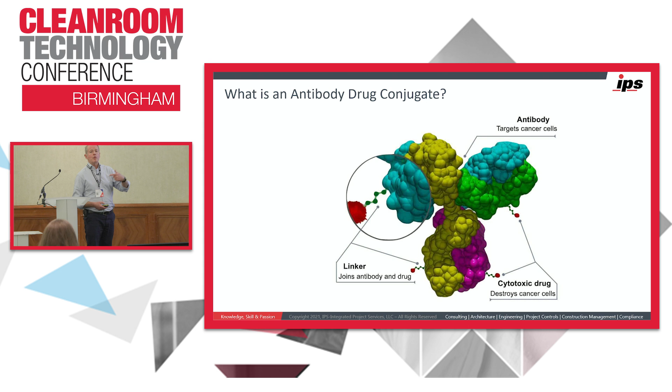Now, they are quite complicated because this linker sometimes detaches, sometimes doesn't, and it's all by design. If that linker detaches, sometimes this highly potent thing can leave the cell and go on to neighboring cells, and that's what you don't want a lot of the time because it can damage healthy cells. There's 15 of these actually being licensed at the moment globally, but not in every country. In the US, I think there's 13 licensed for use. In Europe there may be 15. But it's only been growing over the past 15 years.

So we go to the next one. This is more just pretty pictures, okay? So there's your MABs, there's your cytotoxic agent, and there's your linker. And this is how it's internalized. There's antigens like this on the surface of cells. So the idea is, with a cancerous cell, a tumor, you have certain receptors that are more prolific on these cells. So the ADC, or the MABs, targets these cells and doesn't target the healthy cells.

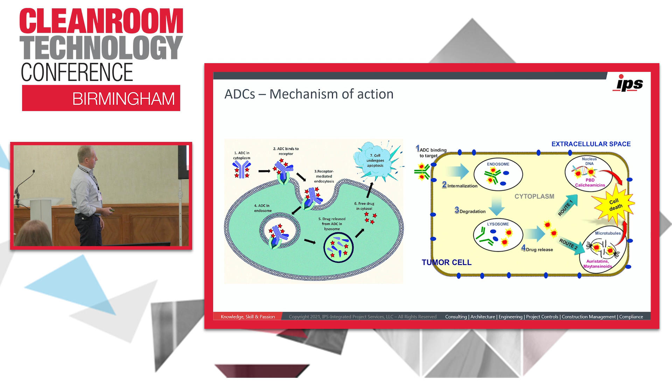That's how it works. So with certain types of cancers, there's a lot of certain antigens on the surface of those cells, and they're targeted. And the ADC, as it's traveling through the body, just ignores all the healthy cells. It's simple as that. And that's just a picture of what happens when it goes in, and there's different modes of action when it goes into the cells.

So a historical perspective, this fella here, Paul Ehrlich, he was born in Poland, but he lived in Germany for most of his life. And in around 1900, he came up with this phrase: if a compound could be made that selectively targeted a disease-causing organism, such as a cancer cell, then a toxin for that organism could be delivered along with the agent of selectivity. So that actually describes an ADC. He was thinking of that concept in 1900.

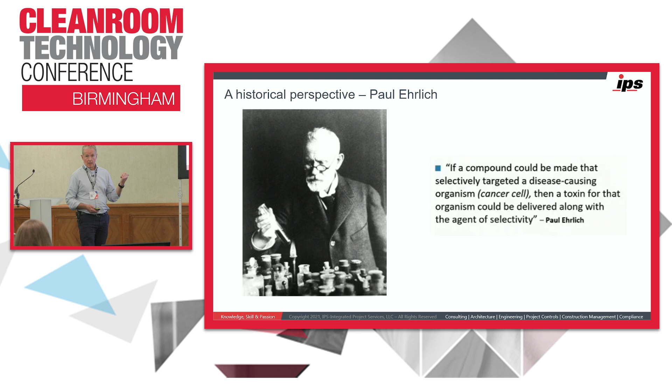So this guy was brilliant, okay? He won the Nobel Prize for medicine. He discovered a cure for syphilis before penicillin was brought in, okay? And he came up with this word, magic bullet. So any time you have somebody talking about ADCs, they always mention this person here.

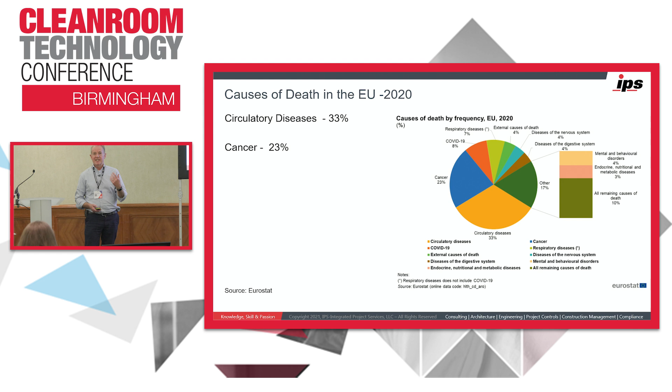Now, I don't expect you to see this, but when I was looking at ADCs and I've been developing them, I said, well, what's the biggest cause of death in the EU? It's circulatory diseases, 33% in Europe, okay? But cancers, it's falling behind at 23%. And all ADCs at the moment, they're all dealing with oncology, okay? These cancer diseases and tumors, okay?

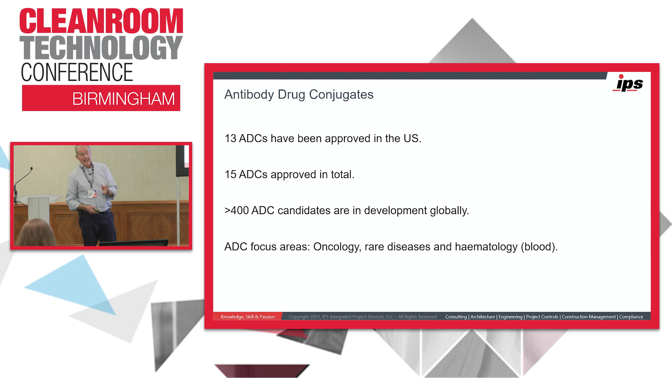So this is just a summary of what I talked about already. There's 13 approved in the US, 15 in total, but there's loads and loads of development being done. Over 400 are in different stages of development, all stages, and many of them in clinical trials at the moment, okay? And the focus area mainly is oncology, but there is a bit in rare diseases and hematology as well. So these are the ones here, okay?

And what I did is, at the end of it, you see what they're for: leukemia, Hodgkin's disease. Now, Mylotarg, for example, that was the first one that was approved in 2000, and then it was withdrawn in 2010, okay? And this is happening a lot with these ADCs at the moment. They're being withdrawn for various reasons because they are quite dangerous, yes? So the negative effects on patients versus the benefits can be quite severe.

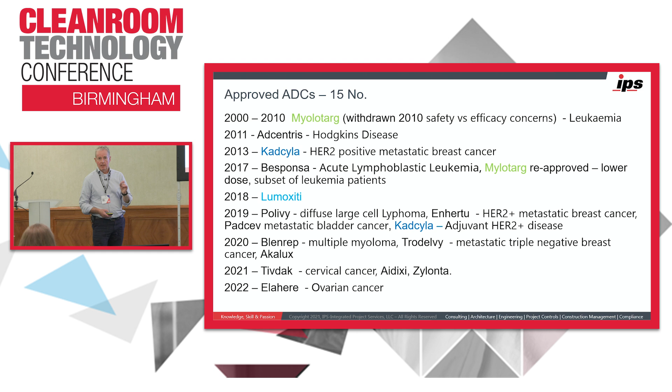So Mylotarg was then, let's see what year it went. It was reapproved in 2017, but for a lower dose of the drug and for a subset of leukemia patients. Now, there's some big blockbusters in here. I have a slide. These are the main companies out there at the moment who are investing billions, and they're acquiring companies. That's how pharmaceuticals operate. They just acquire companies.

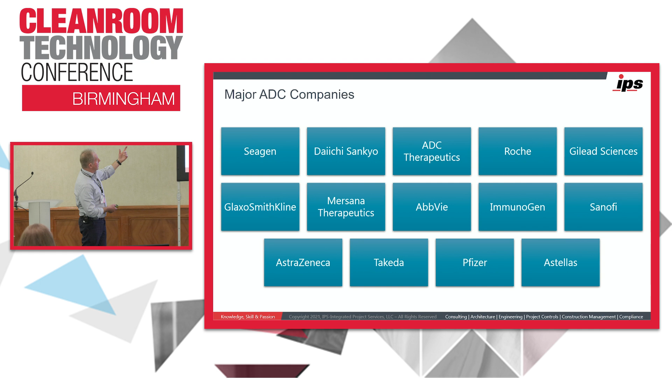And there's a lot of contract manufacturers out there as well, okay? So Lonza, MilliporeSigma, that's the German Merck over in the States, Piramal, the Indian company, SK Biotech, Korean company, WuXi, Chinese company, Lotte, I can't remember where they're from actually, and Samsung Biologics. They're the big players in contract manufacturing, and why people go to contract manufacturers for these type of drugs is because they're so highly potent, yes? And these companies have the skill sets to deal with these high potents.

Now, I'm going to show you a few designs of typical facilities. I can't give you too much information, unfortunately, but what I'm trying to say in these slides is the ADCs are new, the design of the facilities are new. We are finding our way. And a lot in the pharmaceutical industry is subjective, emotional, and people's opinions, and it's not based on science. It's not like drug substance.

I was involved in Pfizer Grange Castle. It was Wyeth at the time in 2000. We knew what we were doing, okay, because the company had built lots of big facilities like that. All these ADC facilities are totally different. The unit operations are more or less the same, but they are multi-product. They're all very, very small scale. You're talking about 60-liter reactors and stuff like that.

You have to have isolation technology, but there's different types of isolation technology. You have a bulk fill operation. Some people want to do it under grade A conditions, which is absolutely crazy, you know what I mean? But you can't argue, okay, because it's in its infancy and you have different parties involved.

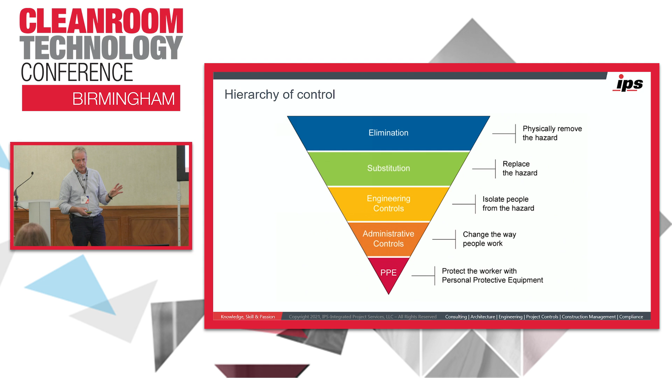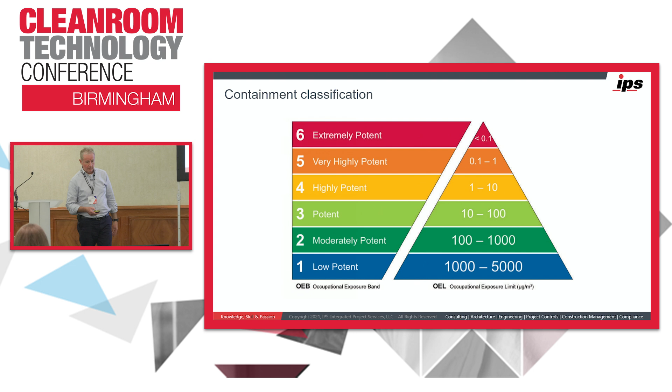And this is, if you ever are designing a plant, people keep going on about OEB levels, OEB 1, 2, 3, 4, 5, 6. There's about 50 different bandings. Yeah, so OEB 5 means absolutely nothing. You need to know what the OEL is. But anyway, any stuff to do with ADCs, it's the top level anyway. It's extremely potent. That's it. Extremely potent.

Okay. So look, there's legislation all over the world. You know what I mean? But the onus is always on the employer to protect the employee. But the onus is also on the employee to behave. You know what I mean? And especially with high potent.

One of the sites I worked on, if there's a spill or an incident with these materials, you have to react appropriately. And you'll see on these sites decontamination kits and special buckets all over the place. And some operators think, oh, we just have to pour this on the spill and it deactivates it and everything is safe. Well, that's okay for product A, okay? If you have product B, it may not work on it.

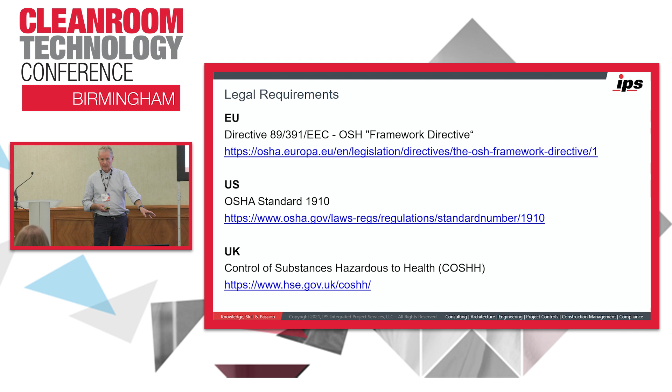So you have to question everything, because I was on the site and I was told by somebody, oh, we use this material and we use it for any spill. So always question what's going on out there with high potency, because people just don't understand.

So risk, I was talking about risk back on the hurling and stuff like that, so it's similar here. Risk is exposure by the hazard. The hazard is the OEL, there's nothing you can do about that. But the risk of exposure can be reduced, for example, if it's in liquid form. When it's in powder form, it's a big risk, you need to do it in an isolator. Once it's in solution, the OEB typically can go down.

A lot of companies don't like that. They say, no, the band it's in remains band 6. That's crazy, right? But it's again trying to convince people that you can base it on sound risk assessments, that you don't need to over-design these facilities as well.

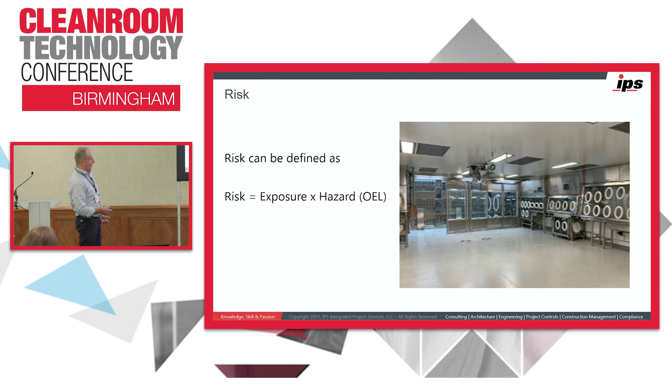So what you'll see here, that's just an extraction booth, yeah? And that's where all liquid operations can take place in this facility. This here is a glove box, that's where powder is present, okay? Some companies wouldn't allow you to do that because they're saying, just because it's liquid form, we're still treating it as an OEB 6 operation, okay? I just like this picture, okay?

So what I was trying to get here is liquid waste. You get liquid waste from the process, from CIP, from emergency showers, and from fire water. And one of the things that a lot of companies don't think about is fire water. So if there's a fire in one of these places, will the fire water be contaminated, and where does the fire water go? Now, that fire water needs to be contained and it needs to be tested prior to being released to the environment. That's not what happens, by the way, okay? So you always have to question everything.

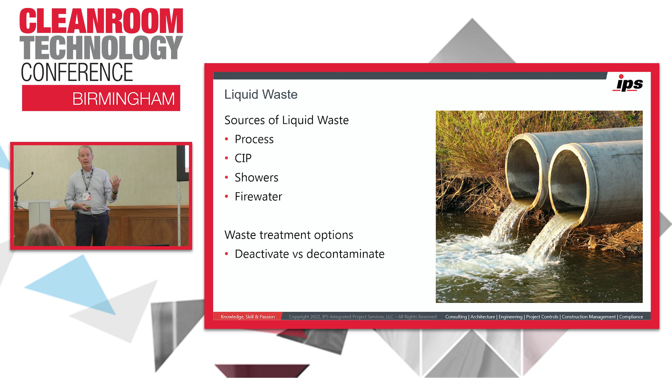Also, typically, you'll collect this waste in special tanks, and those tanks will be in bunded areas, typically located outside. So you get rainwater in that bund. So what do you do with that rainwater, do you treat that as potent waste? Some companies say, oh no, we'll test it, and when we can find nothing in it, we'll dump it to the local environment. In a lot of the cases, you actually can't detect it. That's because it's new, and because the EPA is not on top of this at the moment, that's a risk that's out there. So I'm just sharing information, okay?

So ADC facility, you probably won't be able to read this, but what I was trying to show in this slide was when you're designing one of these facilities, there's lots of factors. There's sustainability, but the challenge with sustainability, you do need excessive use of water and chemicals to clean, to make stuff safe.

For example, if it's a filling line and you're filling this highly potent stuff, you can't just take parts of the filling line out and put it in a parts washer. You need to rinse and rinse and rinse inside that isolator to get some level of assurance that there's no free powder or anything like that on the line. Then you bag it out, you bring it to your parts washer, yeah?

Somehow load that parts washer safely without releasing anything into the air, without the operator wearing breathing air, by the way, because if they do, you've failed, okay, because that's your last line of defense. And then you have to wash and wash and wash if you need to reuse that equipment again. So what we find in these ADC facilities, we try not to reuse equipment. We try to focus on single use. Get rid of it, incinerate it, okay?

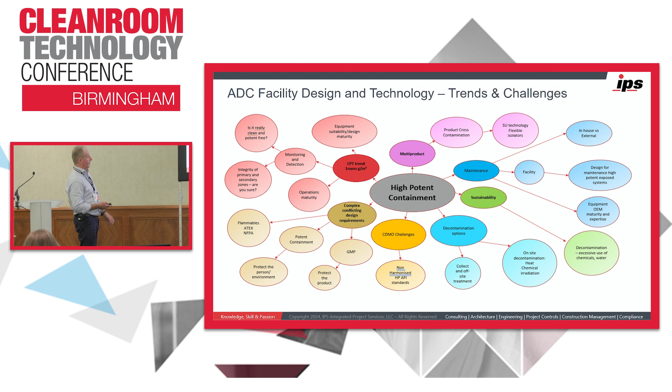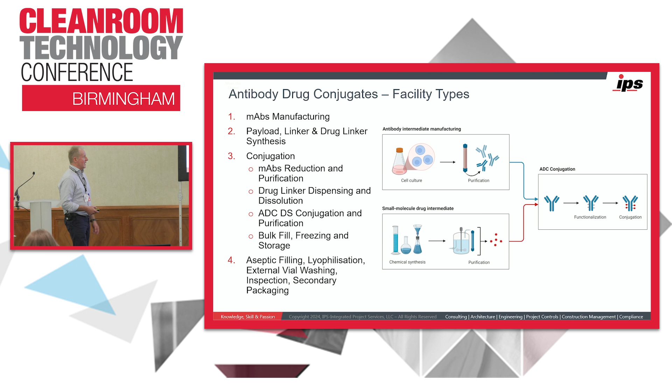All right, so what I'm trying to show here is there's mAbs manufacturing involved, there's payload linker and drug linker synthesis going on, there's conjugation, and there's aseptic filling and freeze drying, external vial washing. You have to do external vial washing because it's highly potent, okay? Inspection and secondary packaging. They're all the unit operations.

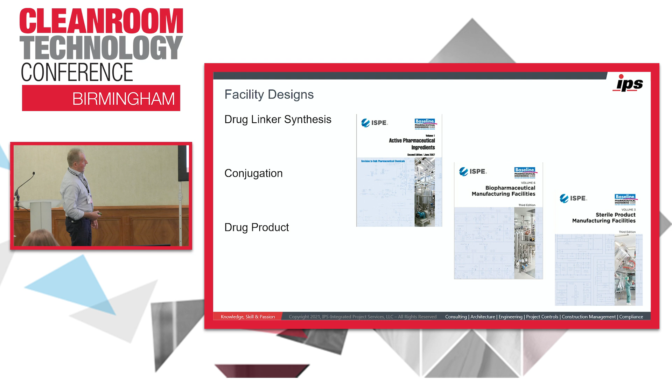Now, there's loads of guides out there. I use the ISPE guides, they're great. So there's the ISPE guide for API, that'll deal with the drug linker. There's the biomanufacturing facilities, that'll deal with the conjugation. And the sterile product manufacturing, that'll do the fill finish bit of it. And then if you're talking about containment, there's tons of containment guides out there as well that you need to read. And these are quite difficult to read, some of these documents.

So if you have a 1 nanogram, or say 10 nanogram OEL level, when you're buying a bit of equipment, the vendors will need to demonstrate to you that their equipment will meet those requirements, and you typically test to 10% of that, so they'll be doing tests to 1 nanogram containment. There's very few vendors out there that can do that. So you have to do a lot of due diligence.

I think yesterday somebody was talking about isolators for high potent containment. There is a company in the UK, Solo Containment, which is part of ILC Dover, the American company, and they do flexible isolators for high containment applications down to 10 nanogram. And we're buying a lot of them for high potent applications because you don't have to worry about cleaning them or anything. Solo Containment are experts in high containment applications, as are ILC Dover.

Having one of those where you use it, you vacuum it up, and you send it off for incineration, versus having a very complicated isolator where you really can't demonstrate it is free of the potent material because you can't really test it to find traces of that high potent. I think it's a no-brainer, but we do have certain clients, I can't mention the names, they are American, top-tier pharma, and they won't accept flexible isolators for high potent. Now, when you're going down to 1 nanogram, like Lonza are doing at the moment, plastic won't work for that at the moment.

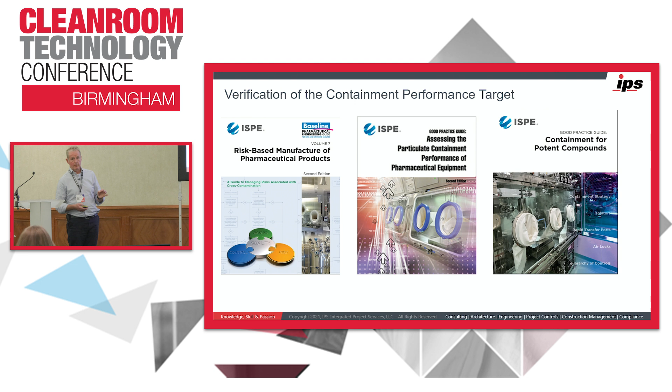So what I'm going to talk about quickly now is some of the designs, just to give you a flavor of what's out there, what we've been involved in. Primary containment is typically the item of equipment. Secondary containment is typically the room. So it could be the reactor as the primary containment. If it's a freeze dryer, it'll be the freeze dryer plus the isolator that's around it, because you open the freeze dryer when you're trying to unload it and load it.

Disposable versus reusable equipment. I'd always propose disposable equipment unless it's not suitable for the application. Some conjugation reactions and the solvents involved, they're not suitable for disposable. Cleaning, decontamination, deactivation, your approach to that. Are you going to use stuff once and just get it out? Are you going to try to decontaminate or deactivate? You can deactivate some of them, but very few of them. And there's vendor experience and expertise. That's key. You really have to spend money on this.

And then there's multi-product flexibility. A lot of these facilities we're designing, in fact all of them, none of them are single product. So the clients are saying we want to build multiple flexibility into the design, but we actually don't know the process. So we just have to make the rooms big enough and make sure the unit operations will fit in the rooms. And the scale of operations. The scales, look, it's all small scale. It goes from 10 litres up to maybe a metre cube. So they're small scale.

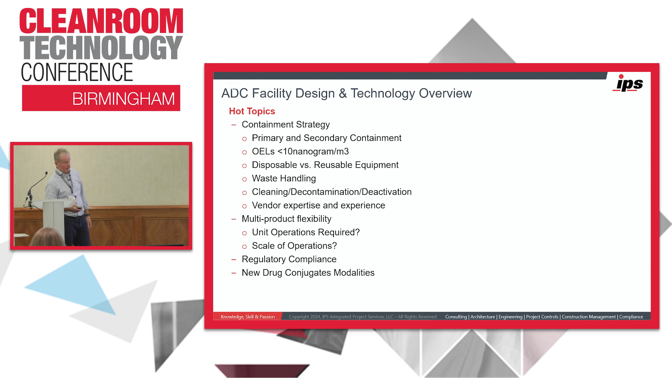Regulatory compliance is a big thing, which I talked about, the different regulatory compliance requirements for the different phases of the unit operations. And there's new drug conjugate modalities. Because I talked about antibody drug conjugates. There's peptide drug conjugates. In fact, we're doing a job in the States at the moment. It's a $1 billion job where they have antibody drug conjugates and peptide drug conjugates in the same campus. Right. So this is one job in the US.

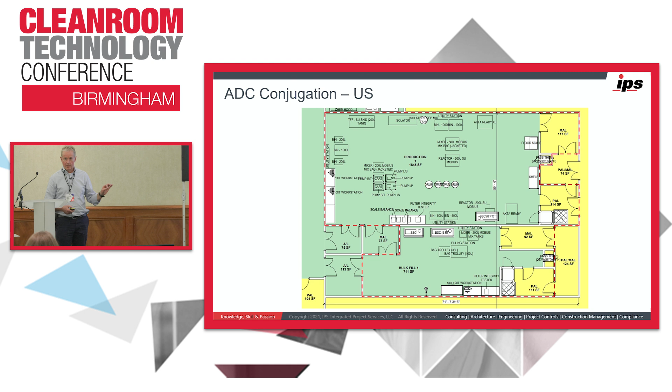Here it's in the C room. Sometimes people want it in a B room, into an A container. It's nonsense, but that's what some people do. And what you'll see here is that the big thing, this is the containment boundary. Now, Justin in a few minutes is going to talk about airlocks and getting into these rooms and getting out of these rooms and misting showers and all that stuff. So what I was trying to say here, it's 10 nanograms, it's multi-product. They don't know the products, actually.

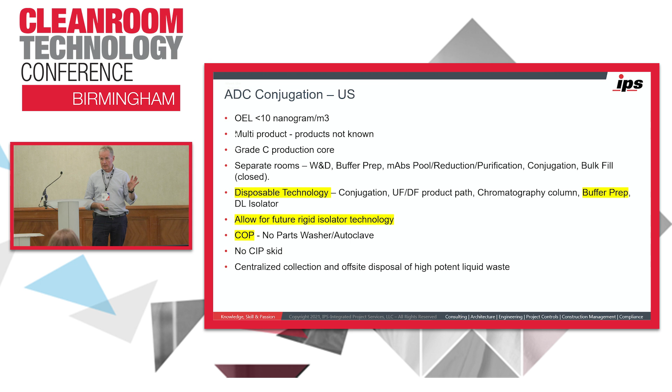It's disposable technology. Now, they wanted to allow for future rigid isolation technology because they weren't sure whether the flexible would work if they went lower. And they've no clean out of place, no parts washer, no autoclave, because they're going to chuck everything out once it's used. So the rule of thumb when you're dealing with high potent stuff: if it doesn't need to be in the room, don't bring it into the room. If you're making up buffers, you don't bring the buffers in the room, you pipe them through the room, and you make sure when you're pressurizing the room, you don't pressurize from the high potent zone to the safe zone. It was the basics.

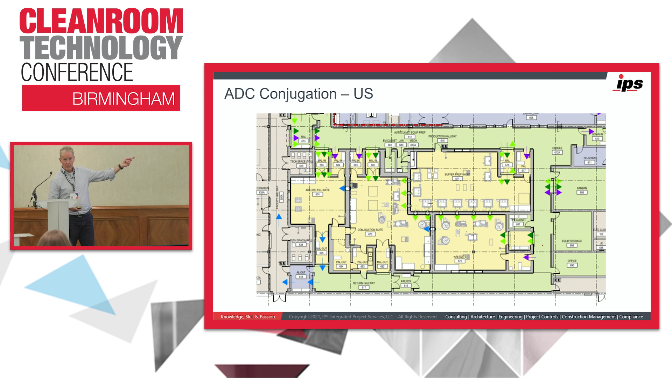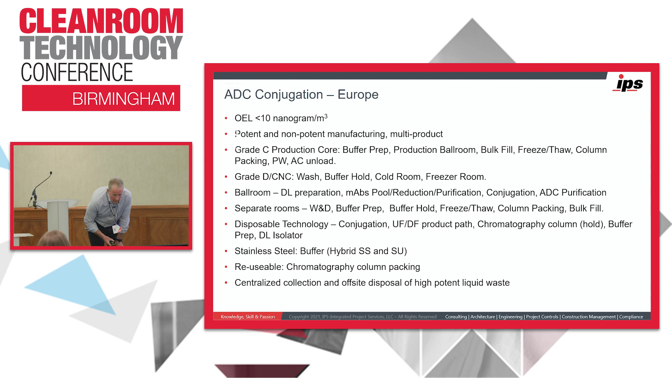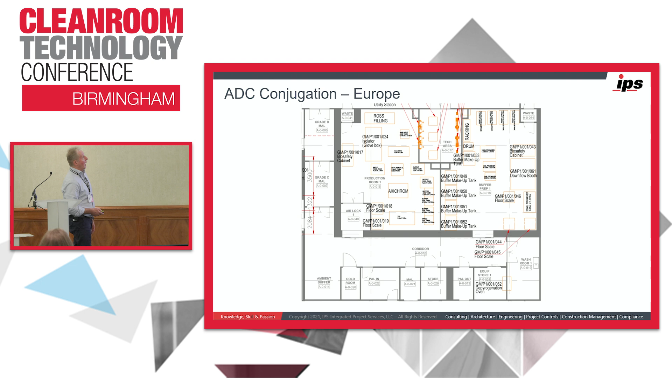So what's this? This is one in Europe. In fact, this is a ballroom design. I want to get you a layout here to look at. This is one very close to home, in the UK. And this is a buffer prep zone here, and this is a conjugation room here, and everything is happening in the conjugation room. This is a contract manufacturer here, and it's 10 nanograms.

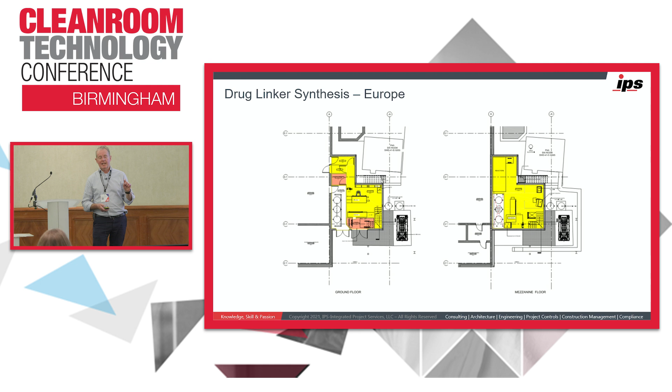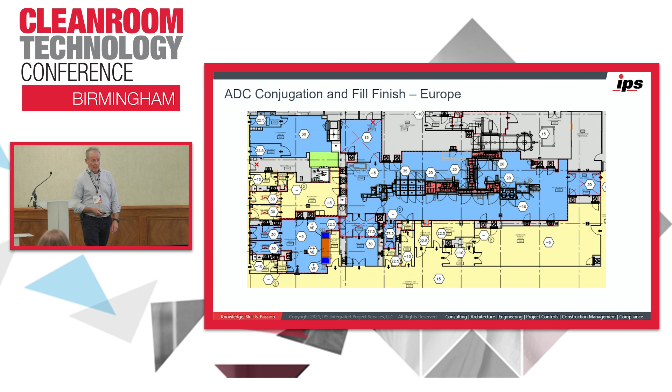So these are the considerations for these type of facilities: flexible versus rigid, active containment isolators, extract booths. Some people, believe it or not, stick their unit operations like chromatography and UFDF all within extract booths. Some have them sitting in the middle of the room. So, I mean, it's the same containment requirement, but they're all different. And it's just the way it is in the industry at the moment.

Breathing air, some have it as standard, some have it by exception. If you're dealing with solvents, you need to do ATEX risk assessments, which is a bit of a challenge. So you got GMP, you got high potent containment, and you got ATEX all in the same suite. There's multi-product and multi-modalities that offers a challenge as well. And some people want potent and non-potent in the same suite. You can do it, but obviously you just need to risk assess how you do it.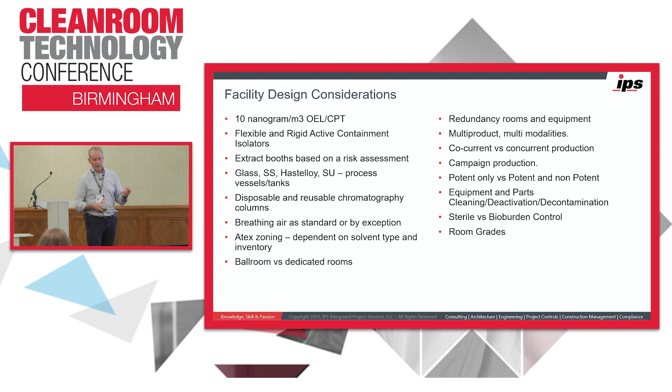Yeah. And there's sterile versus bioburden control, as I talked about in the bulk fill, and the room grades as well. There's no consistency in room grades. Right. So now we get to the interesting bit, Justin, architect.

Thanks, Kevin. Okay, I will run you very quickly through the clean room operating as an engineering control for this. And I think Kevin touched on it very well there. You know, when we do this work, we have to cooperate really tightly with the process engineering and the process technology group. That's why there's two of us here. We can't treat each other with the distance we used to. We really have to work really closely together.

And it's because you keep getting the consultant's answer to everything in these. It depends. It depends on the risk assessment. It depends on the equipment. It depends on the operations. But I think Kevin covered it again accurately. Engineering controls is what we're interested in here. For various reasons, we can't do the top and we don't want to do the bottom.

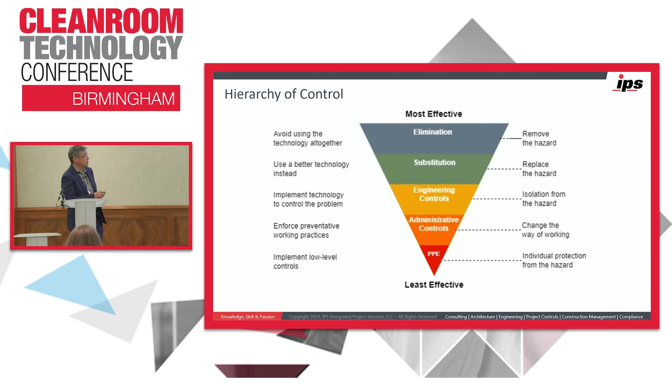I'm going to go quickly through this, but your primary containment is your closed process, whether that's a vessel or whether that's an isolator, depending on where you are in the process that was described there, from the API through the conjugation down into the fill finish. There will be different primary containment, but there will be primary containment.

Secondary containment is something that's been around API forever. It's been around potent substances forever, but it's much, much more critical now because of two things. One is the very high levels of potency that we're using, and the other is it's not always detectable. We can't assume that there hasn't been a breach within the primary containment. So your secondary containment really does become a massive part of how we design these facilities and how we think about them. Tertiary containment, you know, you don't want to build this thing in the middle of a very sensitive area.

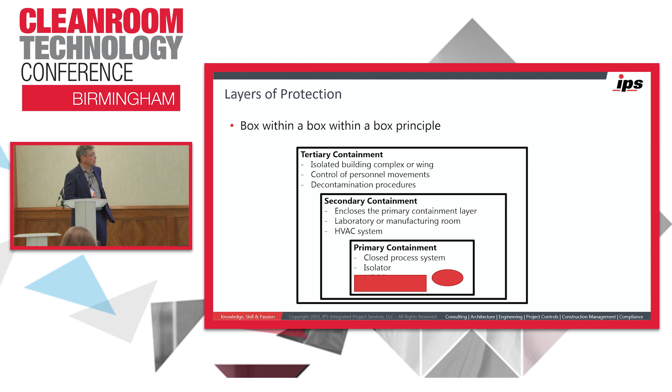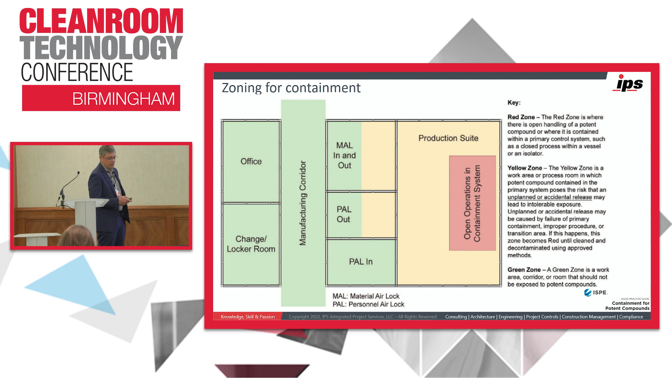It's not necessarily whatever type of facility you're in. This may not be behind a garbing area. So, you know, you're not very far away from danger, and it is important to get it right. So how do we do that? We do that with airlocks, which is what we've always done.

Blow all the air from the corridor in there, and that protects the corridor, and you've still got your airflow out of production. And that works in some scenarios. The difficulty with it is our friend Annex 1 tells us the airlock has to operate at the same standard as the production facility behind it. Doors are very seldom proven to be 100% sealed, and anyway, when you open the door, you're dumping a load of lower grade air into that airlock. If you've got particulate monitoring or anything in there, the alarms are going to go off. But there are times when it is appropriate.

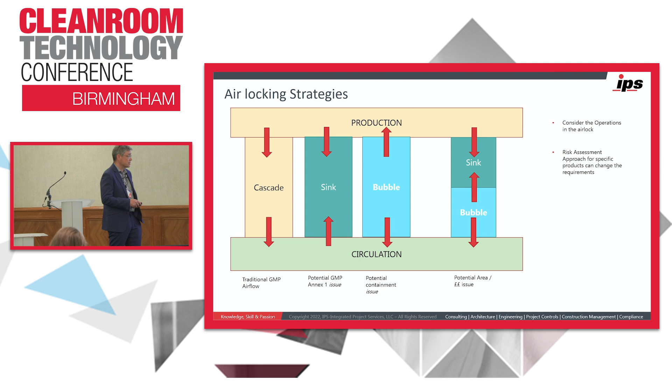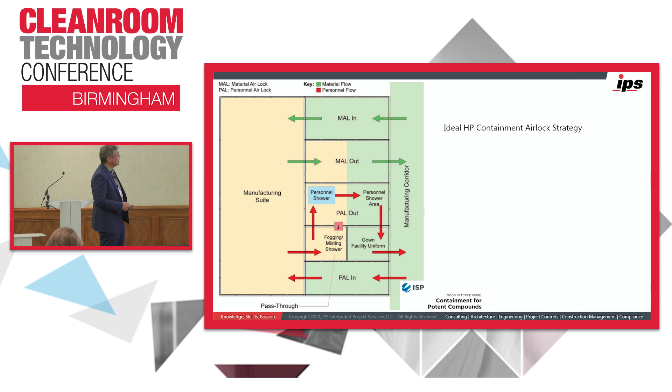So if we expand that out a little bit, again, ISPE guide, this is an idealized airlock strategy. This is what we'd do if we had all the space and all the money all the time. But it is a very good illustration of what can work here. So we've just drawn on top of this to illustrate what it can do and what it can't do. To think about this in any sort of rational way, we've got to consider the containment boundary. So this is a containment boundary superimposed on it.

The easiest possible one is your MAL in. When you're coming in through the MAL, there's absolutely no reason to believe that you've been contaminated in any way. So the containment boundary sits on the inside. When you're leaving the facility, there's every reason to believe that you have some contamination, so you can't cross that containment boundary until such time as you have changed your garb or gone through some process of, yeah, I'm talking about garb and MALs, but you know what I mean.

PAL in, exact same discussion as the MAL in. There is no reason to believe that you've been in any way contaminated, so you don't need containment. You're not crossing the boundary till you get there. Again, this is all secondary containment boundary. When you're leaving as a person, you're going through what's called up as a fogging or misting shower here, but that's your de-garb. That's your sink. That's where you're getting rid of anything potentially contaminated off you. You can then cross over and be out into showers and gowning and whatever else.

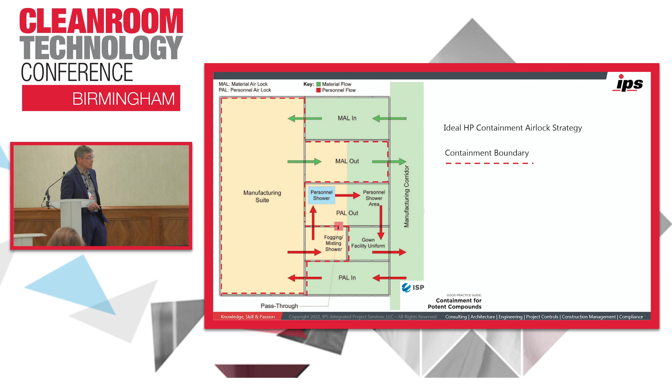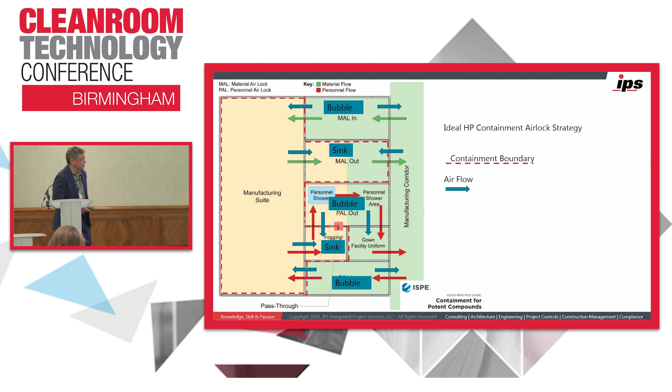Then, when you're going out, you're hitting that sink. You get rid of all your garb in there, and now you're going against the airflow, and you're out. So when you open that door, there's nothing coming in, there's nothing coming out. Everything is coming into the sink, and once you get out here, you haven't brought any contamination with you. And then you're clear. That's set up as a bubble there, where you've got additional rooms there. Unless you have a GMP reason, they don't necessarily need to be considered as part of the containment strategy.

So, and I'll finish with this, and we said we'd do it on a bit of the lessons learned bit. The consideration of the operations. Everything I've said there is very generalized, very non-specific. When you're doing this in facilities, you've got to work really, really closely with our process and technology colleagues, with the client quality teams and the client EHS teams, because every client will have a different approach to this, and every client will have a different product, which will have a different exposure danger level.

And it depends what you're doing. When I see manufacturing suite, I always think of fill finish, because that's what I started doing. But that could equally be the API area. That could equally be the conjugation suite. And they're very different activities in those with different levels of risk and different approaches. So that's the one critical thing.

The other thing we said we'd mention is, because this is cleanroom, and we're at such low levels, this will occasionally be run at negative pressure. I could talk for half an hour on that, I'm not going to, but just be aware when you're building clean rooms and running them at negative pressure, or when you have positive pressure with potential contamination behind it, it needs to be gas tight, and it needs to be tested to be gas tight. So that gives us a whole set of other headaches.

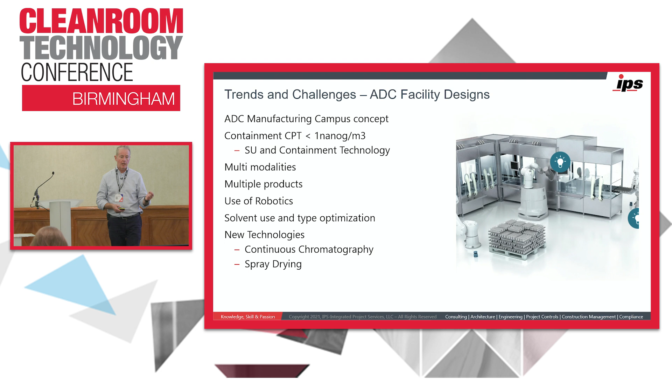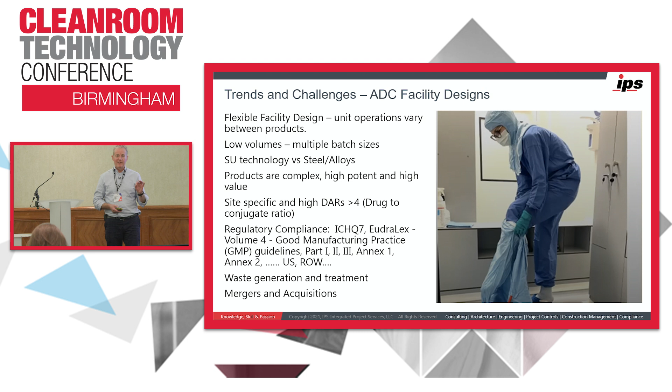And there's new technologies out there for ADC. There's continuous chromatography and there's spray drying. So things are changing all the time. And there's waste generation treatment, I talked about that. There's a lot of mergers and acquisitions going on, and flexible facility design, which is always a challenge. And there's other types of drug conjugates. There's pretty pictures of some of them, and of other types. So there's a whole load of drug conjugates out there.

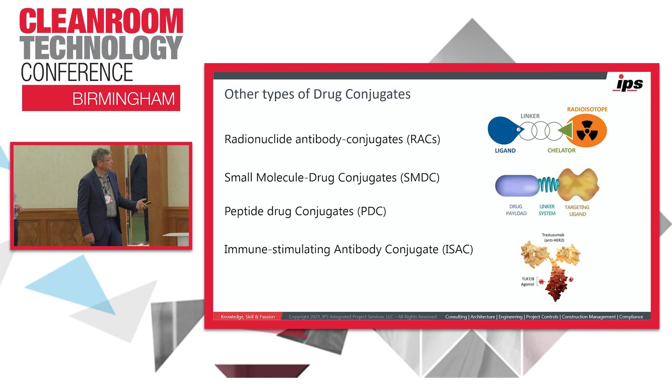Yeah, just one more. You answered one right at the end, which was on the negative pressure, which I was kind of expecting it to be. But I'm interested how you get the waste out of the PAL sink and the garments that they've degowned at that point. There's waste management out of this facility as well, or garment management. Can you maybe explain it from the layout diagram? Yep, we can try. I'll go back to that idealized one, if that's all right.

So you have two things there. One is where you are degarbing. That is generally done in a misting shower. Again, I think it's come up in the last 3 presentations: the industry does stuff that isn't always very well thought through. So we have mist showers on the exit through containment boundaries. A mist shower for a liquid product does absolutely nothing for you, apart from get you wet. But every one of these we've done, we've been told to put a mist shower in it.

One of the things a mist shower does is a continuous bag liner out. So everything that comes off gets bagged immediately and is sealed and can be heat sealed. And it generally comes out that corner there. In my brain, that's what you're going to have to do, but how do you get it clean? You can't detect. You can only sterile wipe the bag, can't you?

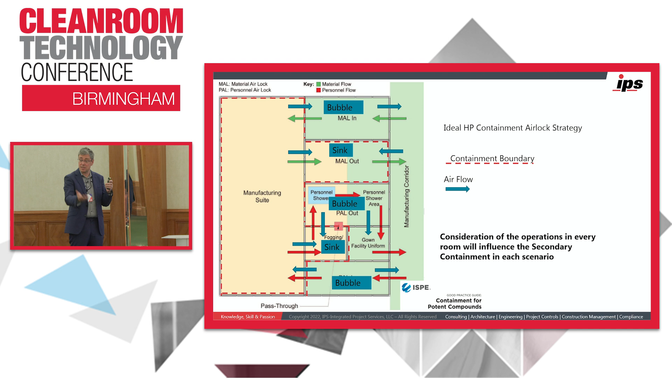Yeah, but it's a continuous liner. So the inside of the liner is open to the containment boundary. The outside has never been in contact with the containment boundary. And then you can tie that or heat seal it, and then you're confident. You generally double bag it immediately, just so you don't catch it in the door handle going out. The challenge is detection. And to be honest, when I hear what's happening in the real world out there, it's amazing. Shocking. All we can do is make it better. Okay. Thank you.